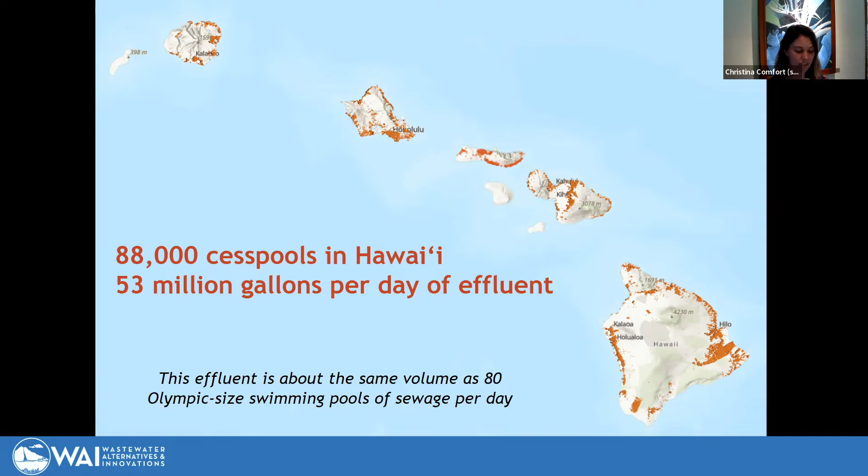And then from the groundwater, this pollution also goes out into streams and the ocean through groundwater seeps, where it impacts the environment.

Some of these environmental and public health hazards include nutrient pollution going onto the coral reef, which causes invasive algae to overgrow the corals and degrades the habitat. This also affects fish populations, and it can also include other types of pollution that can lead to coral disease.

On the public health side, as I mentioned, drinking water pollution over aquifers is a problem. And with increased amounts of nitrates in drinking water, you can start to see nitrate-associated cancers. They see this in Long Island, and that's something we want to try to get ahead of and avoid as much as possible in Hawaii, of course.

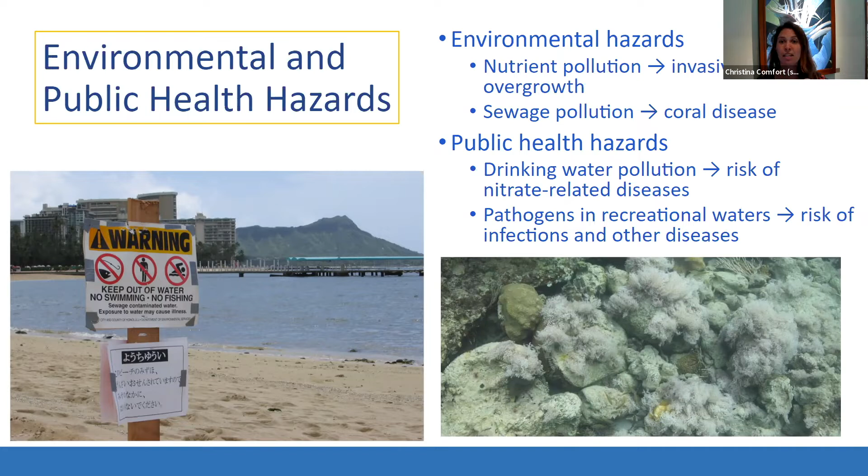Also, pathogens in recreational waters. Probably a lot of you guys who live here have had this experience of going swimming in dirty water and getting sick to your stomach, getting some kind of infection, and those can definitely be caused by sewage pollution.

I'm just going to take you through a couple areas in the Hawaiian Islands that have really clear pollution problems, just to give you a sense of the magnitude of the problems in some particular neighborhoods. The first area to look at is Kahalu'u here on Oahu.

This is an area where Surfrider's Blue Water Task Force has been monitoring for about 3 or 4 years, and we take biweekly samples. I'm a volunteer with the Blue Water Task Force. We take biweekly samples for fecal indicator bacteria. And at this site, 86% of the samples we've taken over the years have been above the closure threshold for fecal indicator bacteria. So this is a really chronically polluted neighborhood, lots of cesspools in this neighborhood.

And lots of people use this area too. There's a boat ramp there. There's a canoe club that's right there. People go fishing on the reefs. So we can see really clearly how this impacts both the ecosystem and the community.

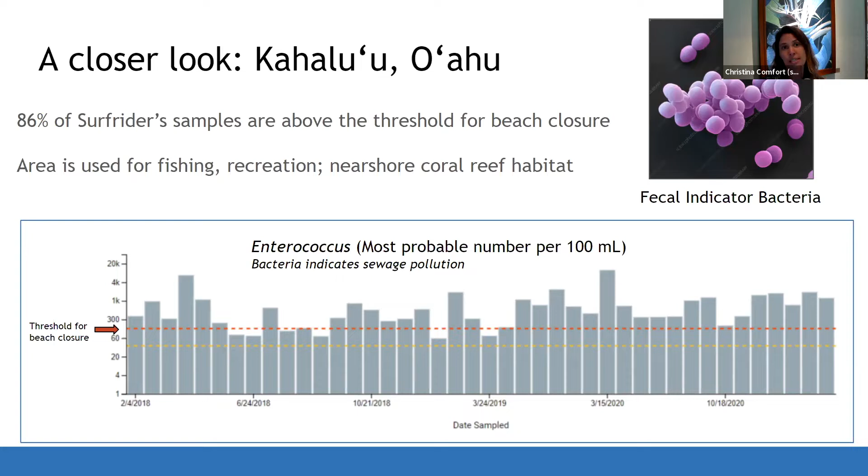Moving over to the Big Island of Hawaii, in Pu'ako. This is an area on the South Kohala coast where there are a lot of homes with cesspools and failing septic tanks, failing ATUs that are right on the coast on lava rock. And dye tracer studies from the University of Hawaii at Hilo have shown that after a toilet flush, it can take as little as 6 hours for the dye they put in the toilet to get onto the reef.

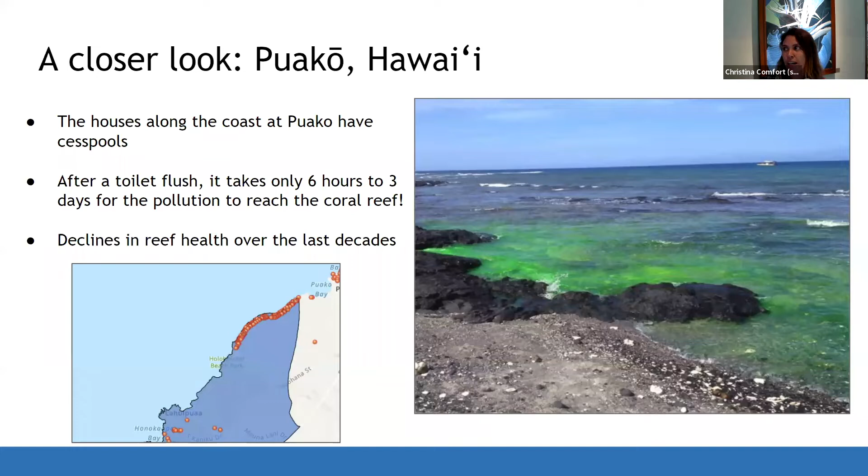So as you can imagine, there's absolutely no treatment happening. That's direct sewage going right onto the reef. And it's a really beautiful reef ecosystem, a lot of diversity there. This is just an example of how reef health can be really impacted by these pollution problems.

And with that, I'm just going to start transitioning into some of our updates and progress since our last convening. So the first thing I want to mention is that there is a new prioritization tool. For those of you who have been following the cesspool issue, you know that in 2017, there were priority areas designated by the Department of Health. There were 14 priority areas, down to 13 now, because one was paved over by lava flow.

But there were lots of areas that were not categorized yet. And through a really massive effort through some University of Hawaii researchers and the Cesspool Conversion Working Group, we have a new prioritization tool that has categorized every cesspool in Hawaii. They used a lot of different factors, including soil type, weather, ecosystem potential for recovery, beach use data, all kinds of different factors to categorize the risk of each individual cesspool.

One thing that this prioritization tool does not include is water quality data. So that's just something to keep in mind, is that it's something to use, but then also we need to look at our data on the ground.

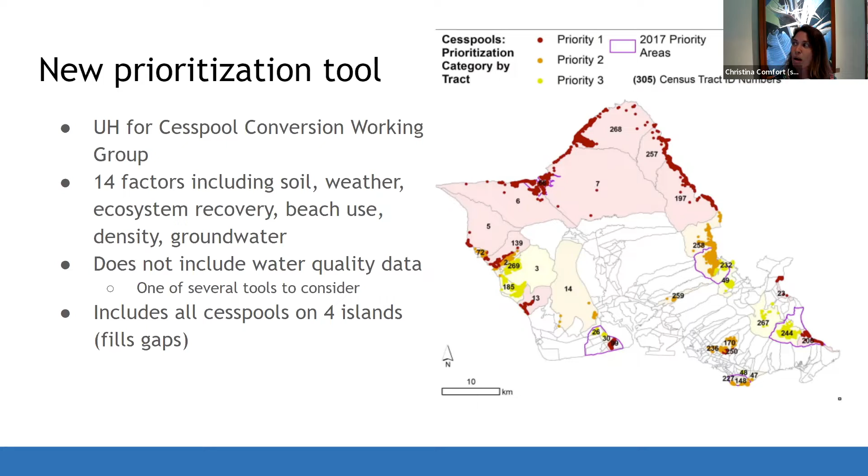So I'm just going to quickly show the maps. You can see on Oahu, the North Shore is identified as a problem area, the entire North Shore. On Maui, there's areas in upcountry and also on the west side and on the North Shore as well that are very high priority. Big Island, Kona Coast, Hilo, Puako area, you can see in the northwest area up there. And Kauai, lots of areas of high priority.

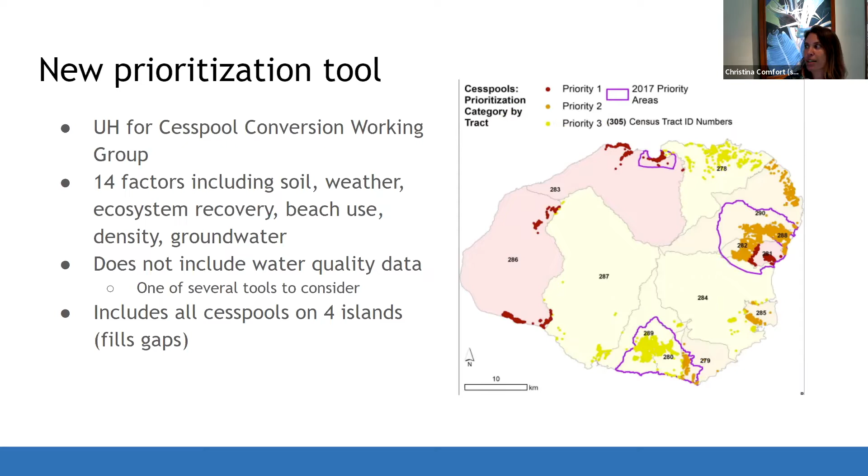So this is exciting and just a new tool to help us decide where to focus finances and effort for cesspool conversions. And I will pass it back over to Stuart to share a little bit about our technology updates.

Thank you, Christina. We're very lucky to have Christina, who's in the process of getting her PhD at UH and is one of the top water quality researchers and scientists in Hawaii. This is the reason that underlies everything we do.

It's about water quality, and since many of us are surfers, ocean lovers, divers, that's one of our motivating factors. I'm going to talk briefly about our tech partners who aren't here today, just to give a brief overview, and then we'll hear from the ones who are.

Cinderella was the first group we met when Chris Lee and I went and gave a talk at the Bill and Melinda Gates Foundation's Reinvented Toilet Expo in Beijing—one of those places where you find yourself thinking, what are we doing here, how did we get here. But they were fascinated to hear about the situation in Hawaii. We met these folks, a Norwegian company called Cinderella, and they were very persistent and wanted to get involved and help out in Hawaii.

So we introduced the first incinerating toilets to Hawaii. There are now more than 25 across the islands. We've been very successful, with some on farms or off-grid, powered by propane, and some electric-powered for in-homes. A number of government agencies have bought these. Instead of putting in all the plumbing and a leach field for a new toilet, you can just put in one of these incineration toilets. They're waterless, and it's just an amazing company—we've had nothing but great feedback from them.

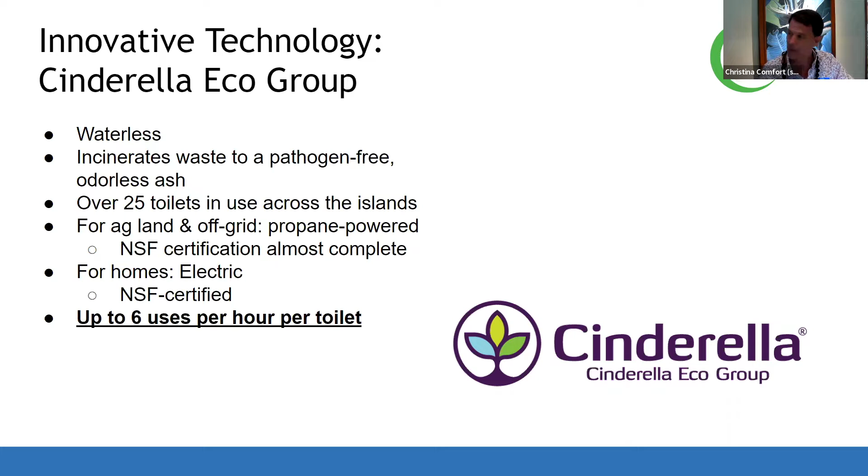We were also very lucky to establish the first one—I have to thank Mitch Dollier for this. At our first Innovations in Sanitation Convening, he said, 'I've got the perfect place for this technology.' I was almost like, I know what you're thinking. He said, Coconut Island, Hawaii Institute of Marine Biology. And it was the perfect fit—they embraced it, they love it, and they went and got another incineration toilet there.

And then this has been really exciting—we applied for a Kauai Innovation Grant to transform a home that was on a cesspool in Kapa'a, replace all the toilets with incineration toilets, and then do a gray water recycling system. This is the first of its kind in the world. The people in Norway at Cinderella were absolutely thrilled to hear about this. I really want to give a round of applause for Yoko, who designed this—not only award-winning, but a really brilliant idea.

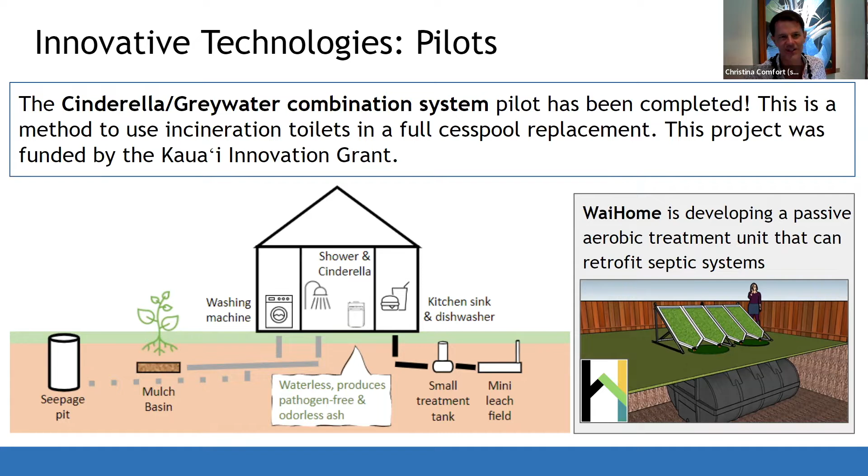So we have a gray water recycling system that does that. And then one of our other partners, James—where's James? You can raise your hand—from WaiHome. He's designing a system that's a passive aerobic treatment using panels, and it uses algae to treat the nutrients and circulates on its own. That's in development right now, which is really exciting.

And then we have Emily from Elemental Accelerator here, and they've been a great partner. They had a deal day kind of competition, and we were selected along with Cambrian to try their containerized MBR technology here. It's decentralized, neighborhood scale—that's where we think we really need to go in Hawaii. Municipal systems, these plants, are just too big, too expensive, and you have to build sewer lines to transport all the waste. So we've been working with them. We have the first system that went in at Pacific Biodiesel on the Big Island, and we're looking at some other areas across the island this year, as they're part of the Elemental Accelerator cohort.

And then this year, as the applications are winding down, we're partnering with a group called Wasted, that believes you should never waste these products—because throughout history they've always been reused. It's only in the last 150 years that we've gotten away from that; these have lots of nutrients. So they're looking to replace the porta potty, which I think we can all agree would be good if we found something with a more pleasant, upgraded experience. They've given us some credit for creating a kind of square partnership, where you have Elemental Accelerator with the funding, bringing in these innovative technologies, then the technology company applying, and then the customer on the other end—but they found there was a missing piece, and that's the local partner that can help these pilot projects move forward.

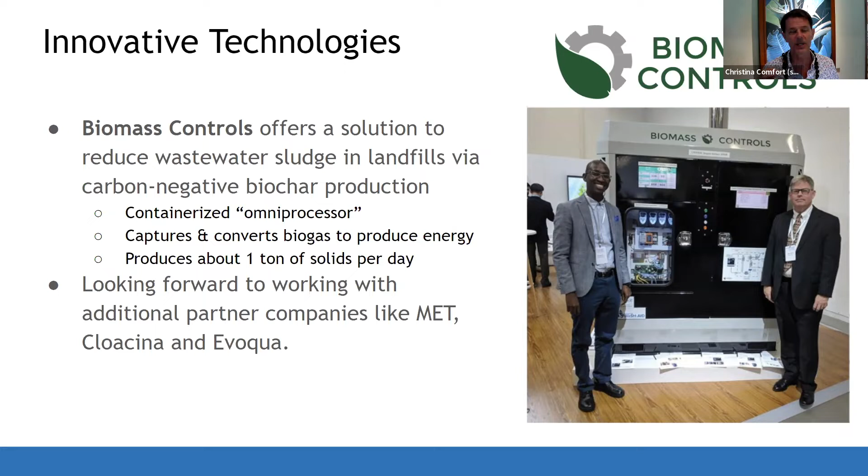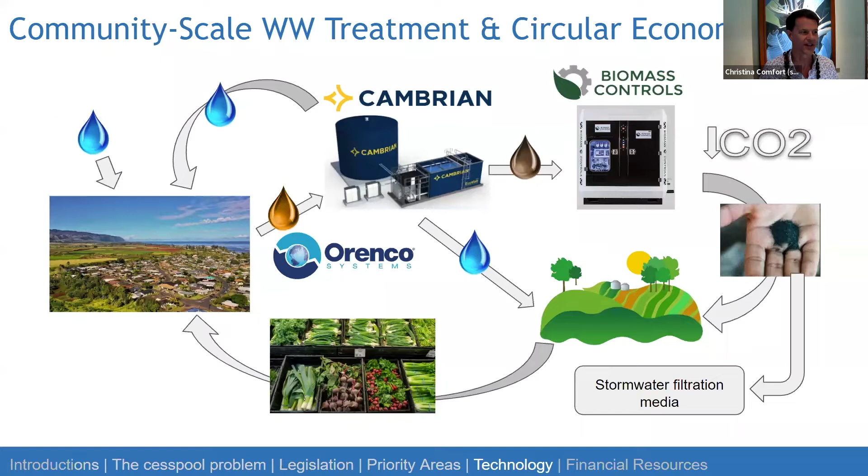When you add up Cambrian's ability to do the MBR treatment - and there are other folks here today that do similar, Cloacina does the same - then you can dewater it, and the water can be so clean that it can be used for irrigation or landscaping. And then we could take the sludge and incinerate it using pyrolysis, produce this biochar, and that can be put on the land. It's not only great as a soil amendment and increases fertility, but it's also a carbon sink, and it reduces runoff and sedimentation. So we're looking at combining all of these technologies in a place like Ma'alaea, which Kelly King will talk about later. This would be one of the first of its kind in the entire world. So Hawaii could literally go from being the last to convert cesspools to being an international leader in this field. And that's what really gets me excited about what we're doing here.

We have done a number of town hall meetings across the state, working with legislators like Chris Lee, who's been there from the beginning, and Representative Nicole Lowen. We do town halls in these communities where Christina pointed out the maps, where those priority areas are. So we just need to educate them - how many people knew about the cesspool issue 2 years ago or 3 years ago?

Yeah, this is a room that's pretty educated - you're invested, but most of the public had no idea. We've talked to people who literally said, 'I still am not sure what a cesspool is and why they're bad.' So we've done all these town halls and we're getting really good reactions. We were afraid at first that they might be throwing eggs at us, because they're like, 'you're the guys who are making us convert our cesspools.' But when we explain the health risk and the environmental risk and the opportunities, then people get excited. That's been really great to see.

We also have a bioreactor garden training that we're doing with Ridge to Reefs. We've done 2 so far, Val? 2 so far. And then we have 2 more coming up - we're going to be doing one on Kauai and one on Maui at Pukalani this Friday. And then we have a Clean Water Hui that Christina heads up. These are really talented volunteers who are helping us with water quality issues and all the other issues that we're working with. We'd love for any of you to join and help us with that.

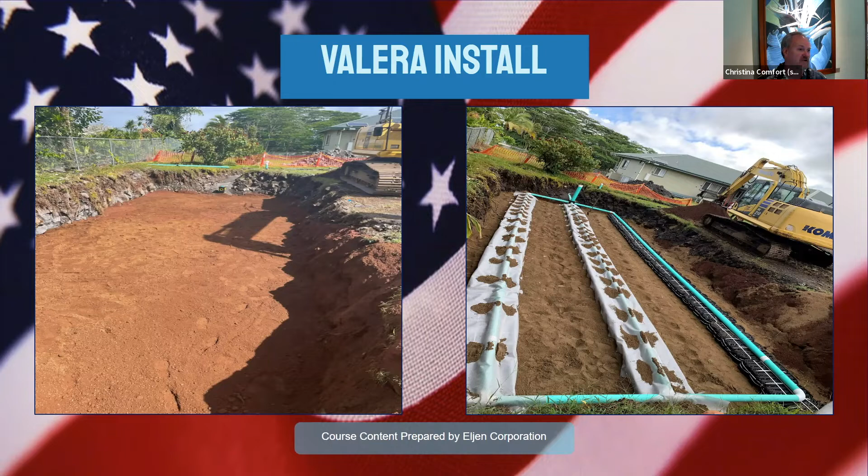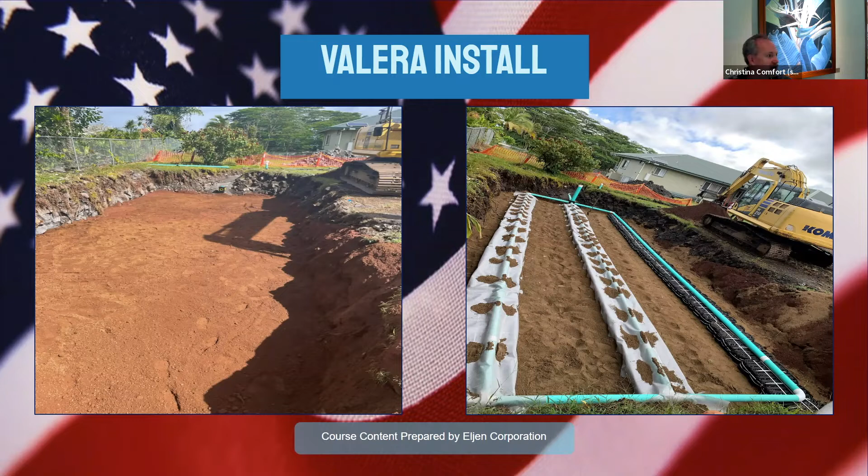Here's a picture of the system going in. We installed about 2 feet of cinder soil, and you can see we had to drill through a bunch of rock - he had about 8 inches of topsoil. The guy that installed it was a one-man operation. He would get on the backhoe, chisel out all the rock, load it into the truck, take the truck down to the quarry, drop it off, come back. He did everything himself in a couple of weeks.

It's hard to tell from that picture, but it's down about 5 feet. That's after the picture on the left showing the 2 feet of cinder soil in there. On the right are various stages of completion - on the far right are the modules without the gray fabric over the top. Once you have the gray fabric over the top, you can fill sand in between, up even with the top of it, and then cover it up. But that was a good project, went pretty well.

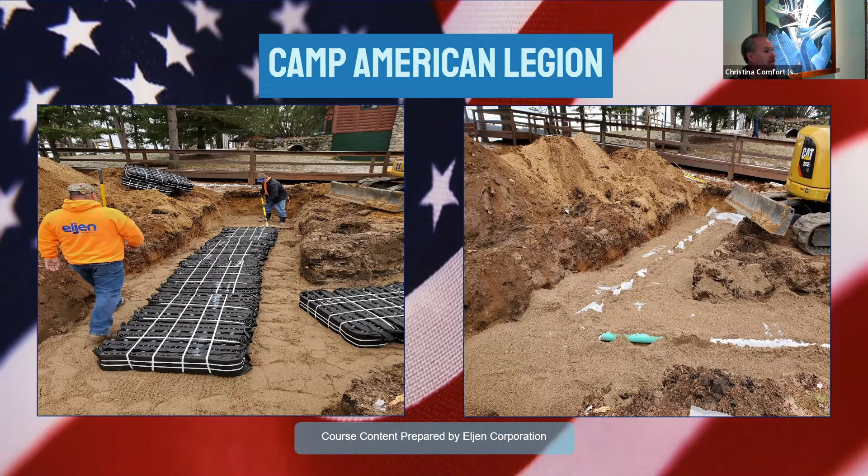This one is in Wisconsin. We like to help out veterans or veteran organizations. Camp American Legion has 16 cabins on a lake, and we donated a system for one of the cabins that had to be replaced, their septic system. They allow veterans to go there with their families and stay for free. They don't charge them for anything. They take them out fishing, they can do canoeing, whatever they want. It's out in the middle of the woods, a beautiful place to go. So we thought that was a worthy donation for us.

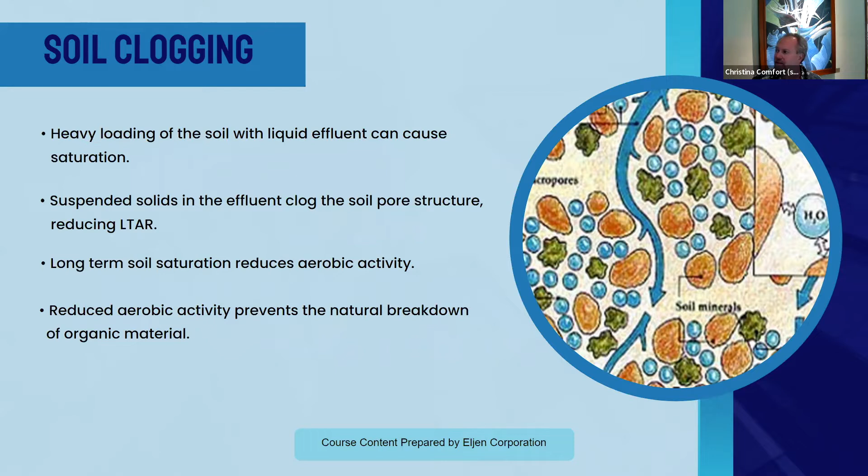So what you have here is how soil clogging starts. Heavy loading of the soil with the effluent can cause saturation. Once you get saturation, the soil expands, and then the pores clog up. The solids in the effluent are also going to clog the pores, reducing your long-term acceptance rate. And then once you have soil saturation, you have reduced aerobic activity. The anaerobic bacteria does not break down those solids as fast as the aerobic bacteria does. So the reduced aerobic activity prevents a natural breakdown of the organic material. You can see how the effluent flows through. The little green things are the solids, and then the water gets clogged there. Those pores expand, and then it just kind of shuts it down and doesn't let the effluent flow through naturally.

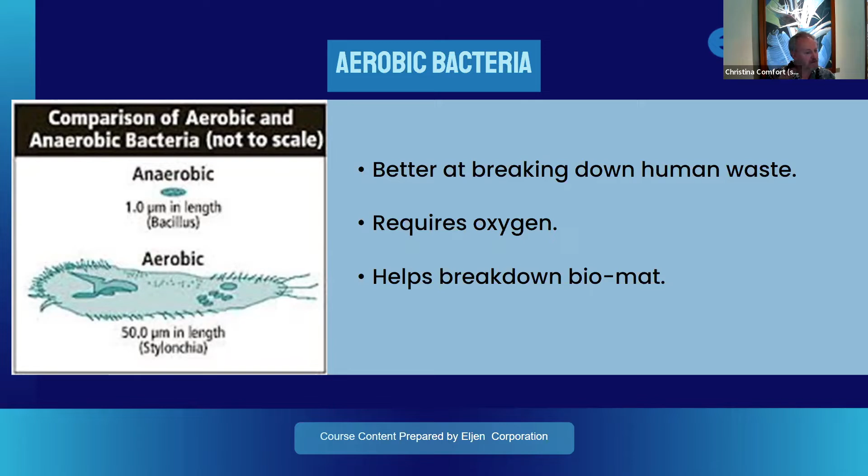On the top is a picture of the anaerobic bacteria. The bottom one is the aerobic bacteria. If you were to look at those under a microscope, the anaerobic bacteria is just going to be sitting there stationary. It's going to twitch once in a while, it's not really going to move, but the aerobic bacteria darts around everywhere. It's always looking for food, it wants to eat all the time. It requires oxygen, so you have to have it. It helps us in our product keep the biomat to a manageable level, because we're using that biomat to collect those organic solids. But if it grows too thick, it's going to take too long for the effluent to flow through. So our system becomes aerobic. We need that aerobic bacteria to manage our biomat buildup inside the GSF.

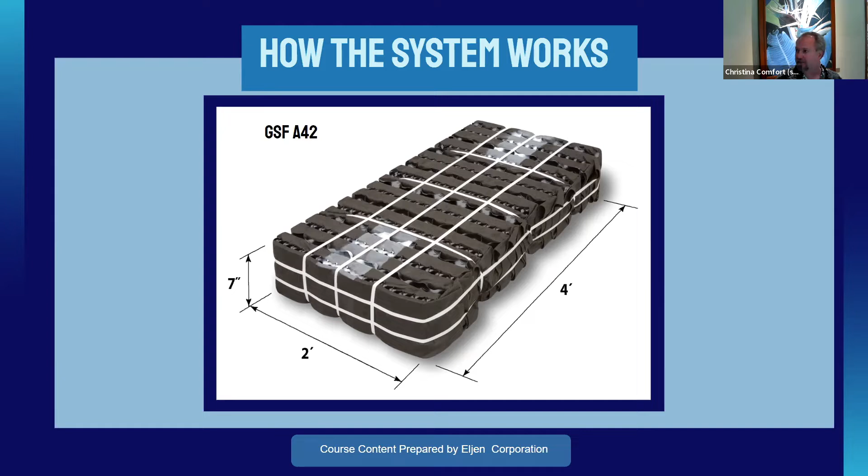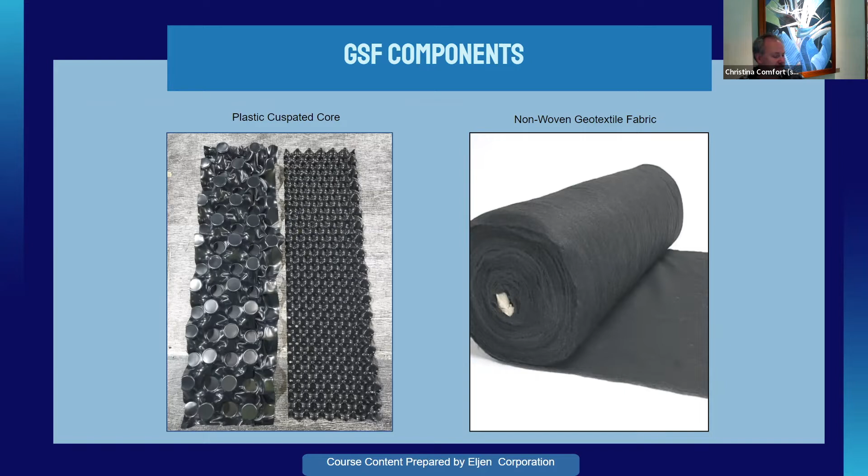So the open air channel areas are where we have the plastic core. What we do is we wrap that fabric up and down and over and under the plastic core material. The plastic cuspated core material, there's one large and one small on the left. And then the non-woven geotextile fabric is on the right. You can see in a picture on the left how it's wrapped up and down, and then they strap it together for the finished product on the right. So that's one continuous piece of fabric. All that vertical surface area is going to grow biomat. When the effluent flows over that biomat, that's going to collect those organic solids. It's also going to process pathogens.

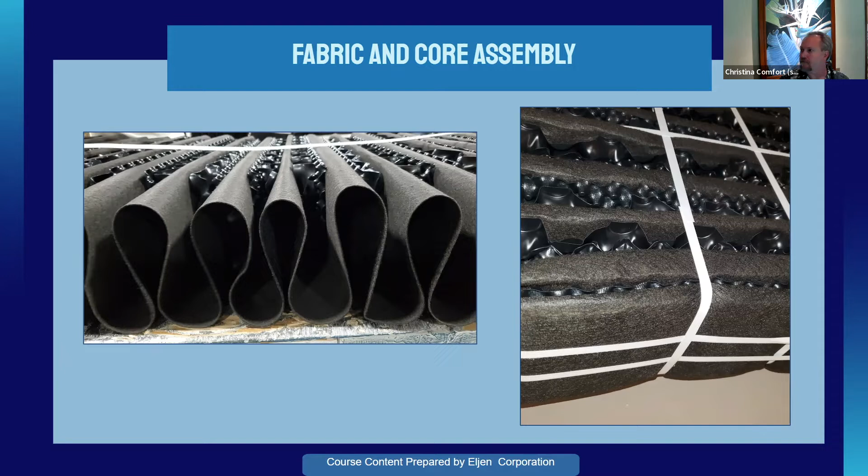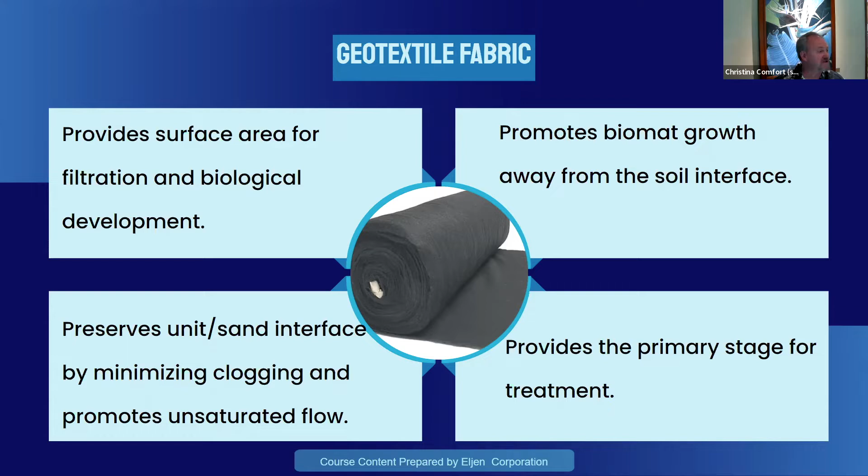So the fabric provides the surface area for the filtration, as I just mentioned, in the biological development. It promotes growth, biomat growth away from the soil interface, preserves the sand and unit interface by minimizing clogging, and it's a primary stage for treatment.

The core provides the structural support. The product is H10 load rated, so you can drive over it with a 16,000 pound vehicle. We never recommend you drive over your septic system, but in some states it's required.

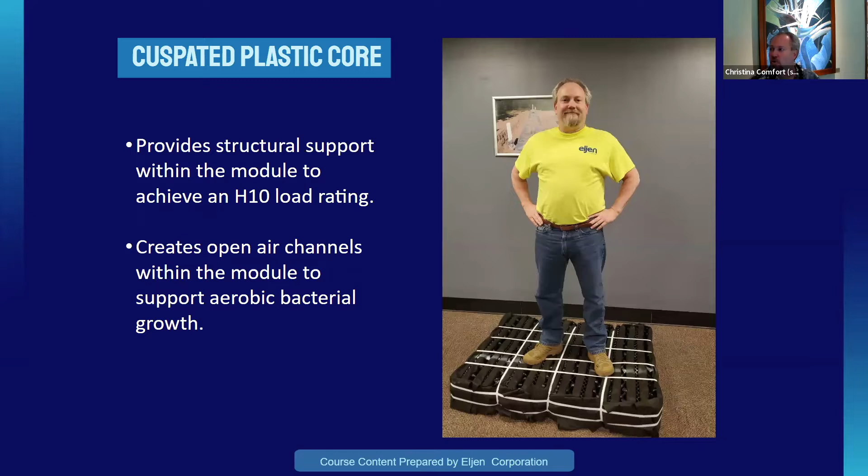It also creates open air channels within the module to support the aerobic activity.

When it's underwater, it's anaerobic. But at low tide, the aerobic bacteria comes in and starts to eat away at all that food, all the nutrients that were left there.

That's exactly how the GSF works. High tide event, your system gets dosed, you deposit solids, you grow biomat. As the effluent drains out, the aerobic bacteria come in and they start to break down all those organic solids, keeping that biomat at a nice manageable level.

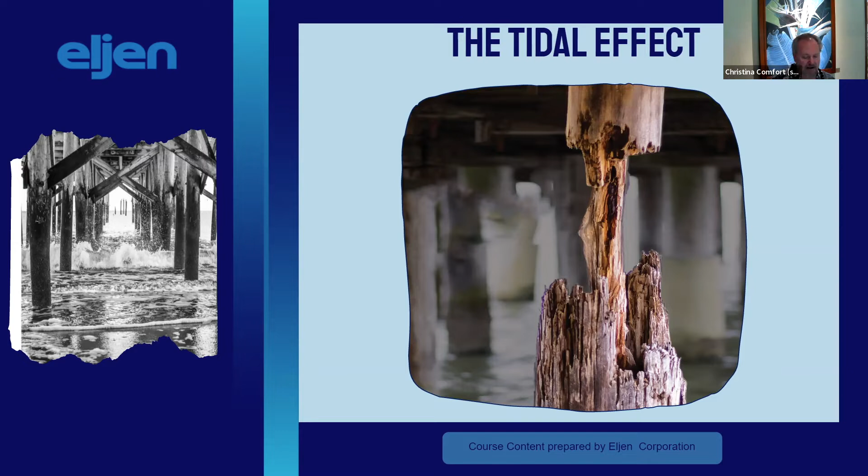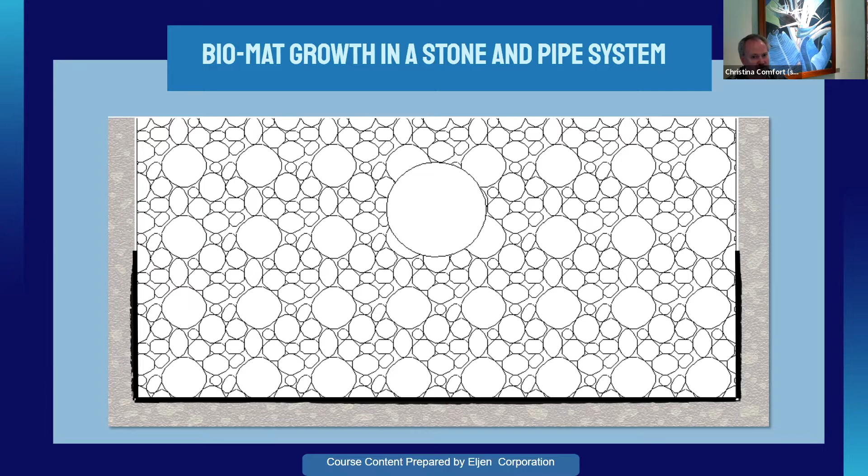It may take a couple of years before that whole trench accepts the effluent at an equal rate when it reaches equilibrium. But the longer it takes for that effluent to drain through, the longer it stays wet, then it grows thicker biomat. I don't know if anybody's heard the term 'creeping failure,' but that's how they discuss how a stone and pipe system works. It's a creeping failure, just a matter of time before the whole thing fails.

Having that sand in there, if you have a fast soil, the sand allows the effluent to drain out at a rate that it still gets treatment. Stuart or somebody was talking about faster soils earlier - this allows the effluent to drain out at a steady rate. If you have a clay soil, it's allowing it to drain out at that steady rate where it doesn't cause saturation. So it works on both types of soils very good.

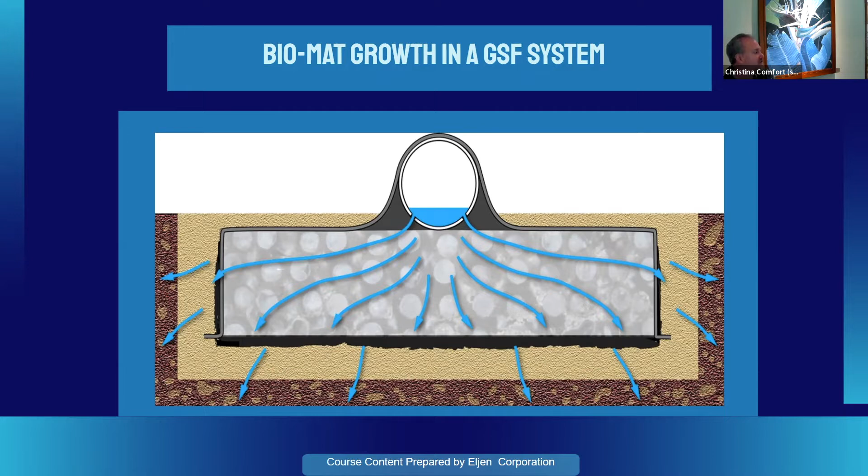Once the effluent drains out, now you have an aerobic treatment zone inside the module because it's draining out through the sand, and you're going to have a thin layer of biomat build up on the sand, right where the fabric and the sand are contacting each other, because you have your two wet surfaces. So it's going to take longer to dry out than for the rest of the system.

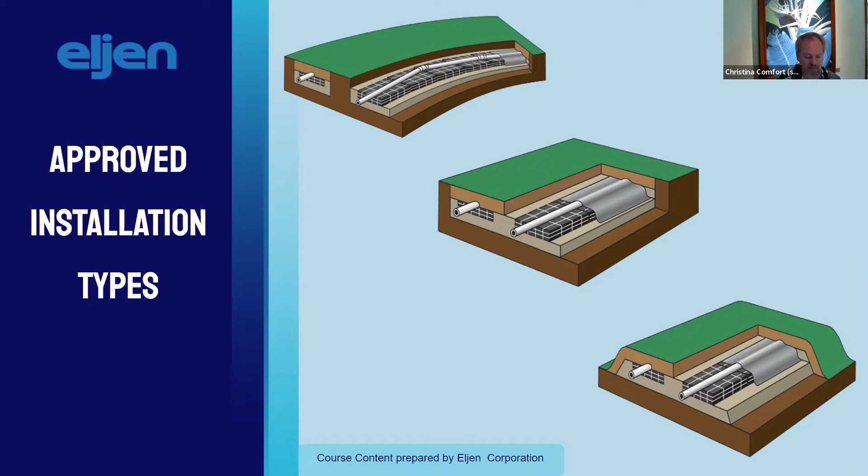Some of the approved installation types: we have trenches on the top, beds in the middle, and mounds on the bottom right.

You can see that white stripe on there, that indicates which side is up, and I'll have a slide on that.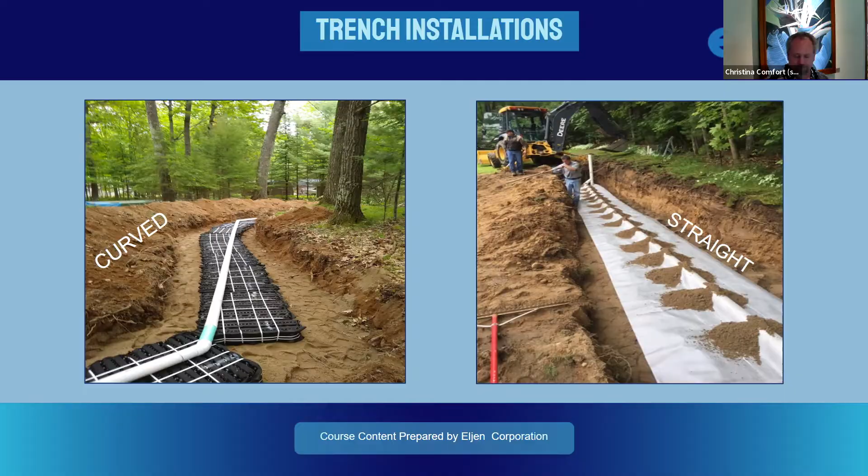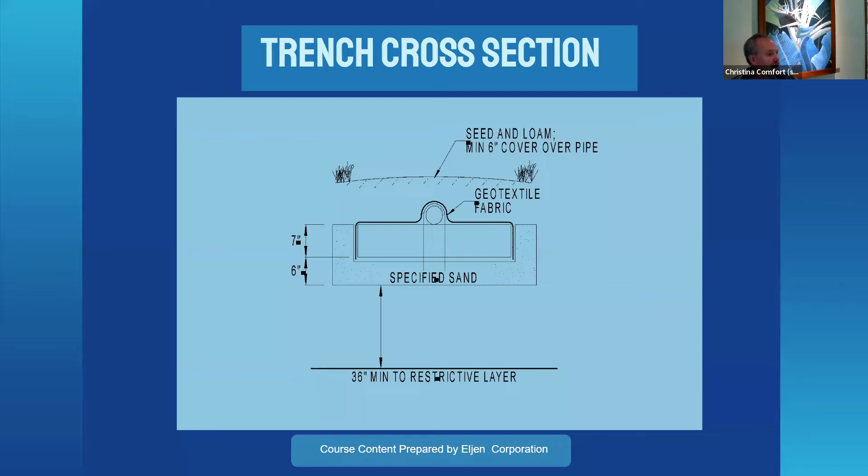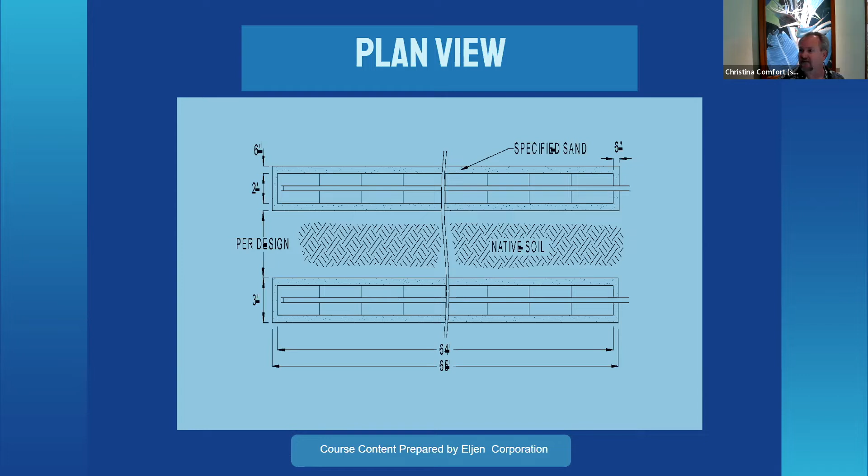Oh, 5 minutes—I thought they said 5 feet. 5 minutes for Q&A, right now? Yeah, so you can just go ahead.

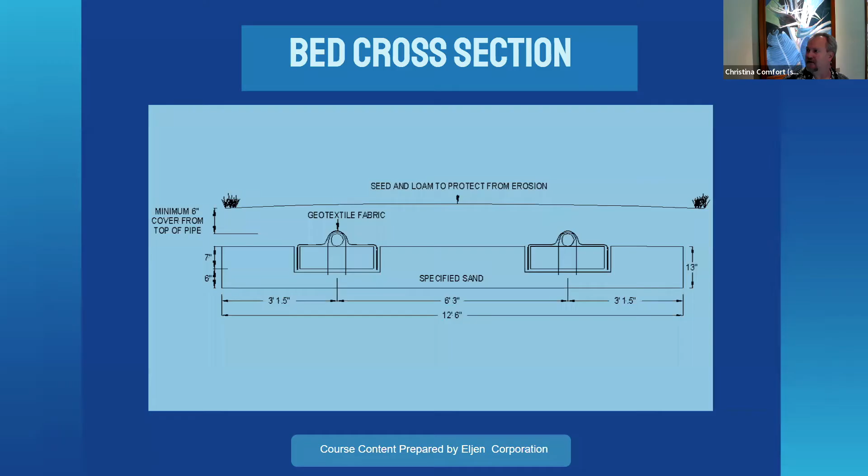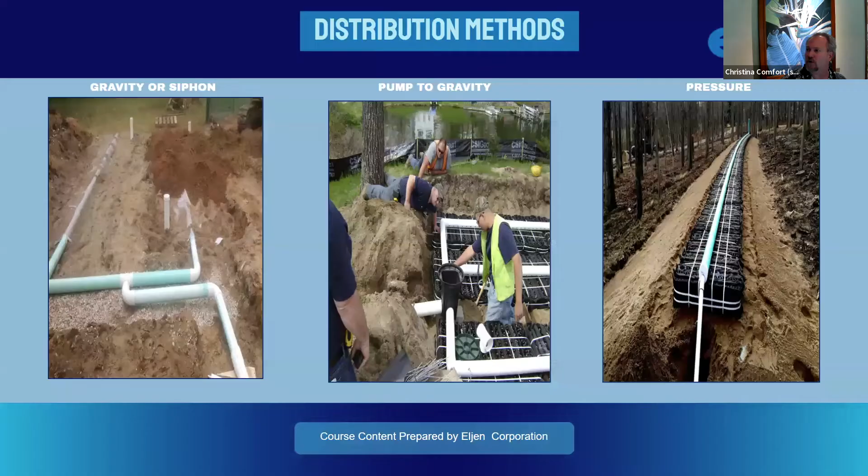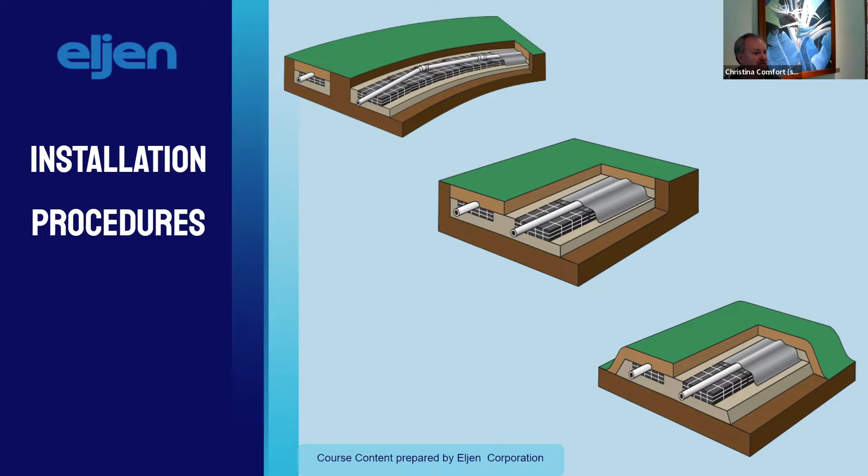Anybody have any questions? Yeah, let's open it up for questions.

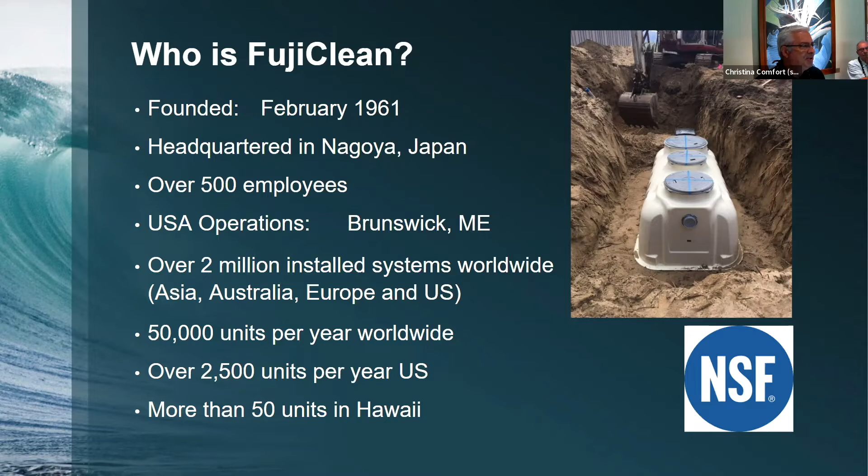Worldwide, Fuji has over 2 million systems installed. One of their big operations is in Australia. America, the US, is a very new and strong market, and much so here in Hawaii as well. We've got right now more than 50 in the ground and another 25 on its way being shipped here now. So during COVID things were very strong because people had discretionary monies and things were being built. But I think we're going to see a slowdown here in the next year or so for sure.

They were highlighted in Newsweek International magazine last year, or I guess 2 years ago. So they're very prominent, they have a great research facility. We were scheduled or hoping to go check out the technology ourselves. We haven't seen the manufacturing facility yet because of COVID. So things are starting to lessen and lighten up, and we're hoping to get over there and really get Fuji more integrated in the Hawaii market here, which we just haven't had the opportunity to do yet.

At Fuji, there's 3 of us. The main license is held by an individual who's not here, he's out of the Boston area. His partner, Richard, who's going to go over some of the advantages of the system in a little bit, and myself as the local dealer. So I have an engineering company and then the FujiClean dealership for here in Hawaii.

We have a number of models, we can cover the gamut for just about any situation for any project out there. So we have systems that are both NSF 40, which deal with your basic aerobic BOD and total suspended solids, and also the NSF 245, which are for certain applications with a very low nitrogen effluent quality. They come in 2 series: the NSF 40 is known as our CE series, our basic models, and our CEN, the N for nitrogen, are our NSF 245s.

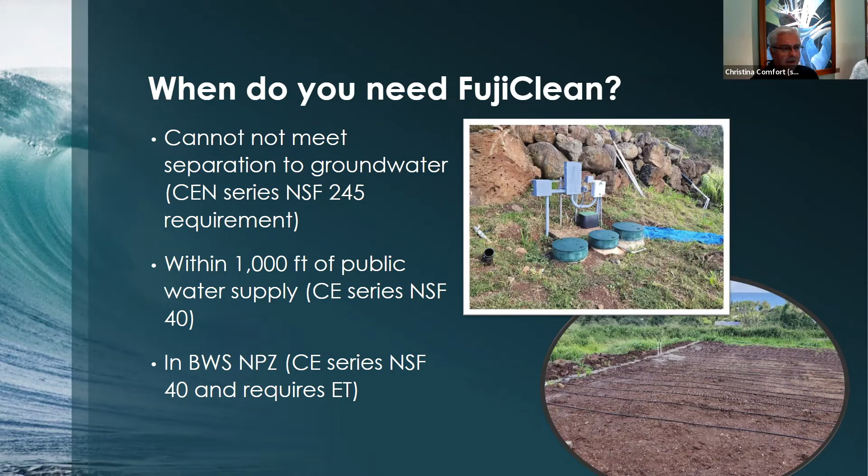So that's the last one, the no-pass zones. We do a lot of ET systems because we have very clean effluent that we can pump through the drip irrigation systems. The last one is if you're within 1,000 feet of a public water supply, and this applies to all islands. We've done some on the Big Island, some on Maui, where if you're within 1,000 feet you have to have an aerobic system, and it has to be a minimum NSF 40. That's where most of our sales are - we're doing a ton on Kauai, Hanalei area, Kapa'a and such. There's just a lot going on Kauai as well.

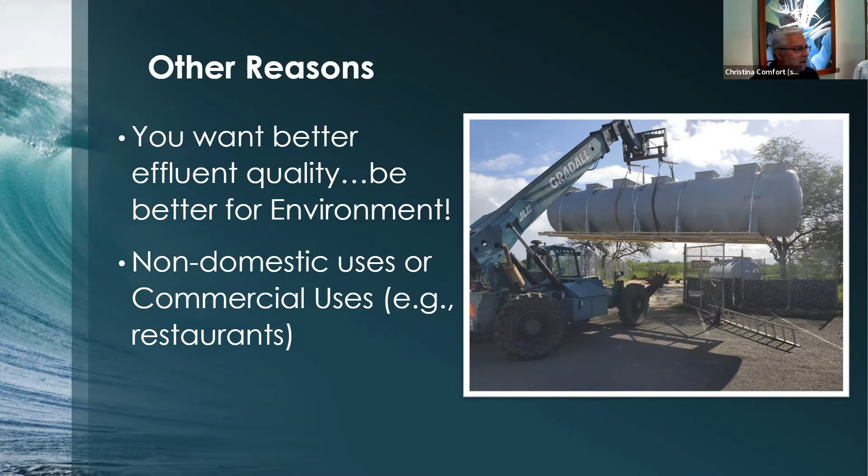It's been great. Other reasons - we get some who just want to be better for the environment. Some of your more luxury estates where cost isn't an issue will do that. This is the picture of the 6,000 gallon system going in at Olomana Golf Course. We also have other applications for non-domestic uses, for restaurants and other industries, where standard septic just isn't going to work, so aerobic is needed.

The difference is - and I've got to say, I'm happy that I ate lunch before Scott went through all that bad bacteria, good bacteria, and all that stuff in the leach field and everything.

Hey Scott, do you happen to know who the bathroom superhero is? The Flush Gordon? Yeah. You know what Superman calls his bathroom? The Super Bowl. All right, I don't have any more today.

So the difference between septic and aerobic is: with septic, the ground, the soil is doing the heavy lifting. As in Scott's example, we did not have soil. Actually, I was the engineer who helped design Elgin, and I volunteered my engineering services for that program.

So we have a lot of prohibitive layers here: rock, basalt, very expansive soil. So it's very hard to discharge. When you have septic, that biomat builds up, and that's where you see the failures, in the leach fields. In this case, aerobic systems, whether passive or active, are doing the heavy lifting. By the time your effluent is hitting the ground, you have very clean, clear, oxidized water, and the soil doesn't get clogged as much.

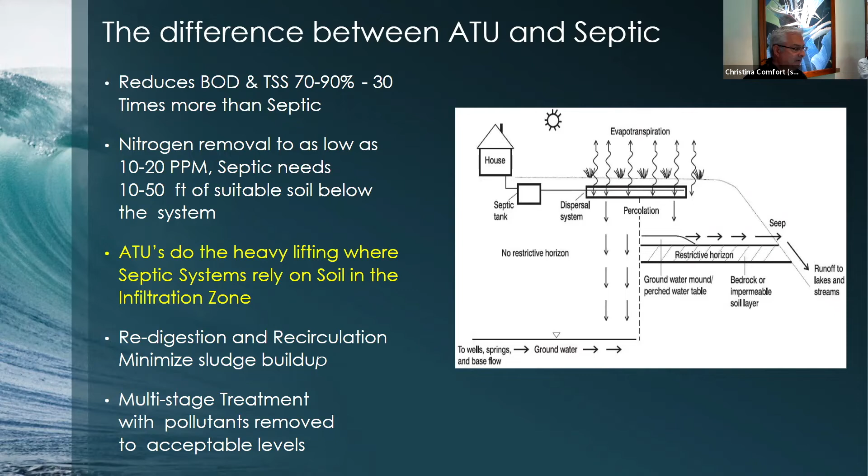So you have much better longevity to your leach field in operation. And also we're constantly redigesting, so we don't have a lot of solids build up. I know I'm going to run short on time, but I have to hand it over to him. He's going to go over a little bit more on the advantages in the actual treatment. Thank you.

That's it, Bill? I got 2 minutes, right? Well, you better hurry then. Okay, you can skip that.

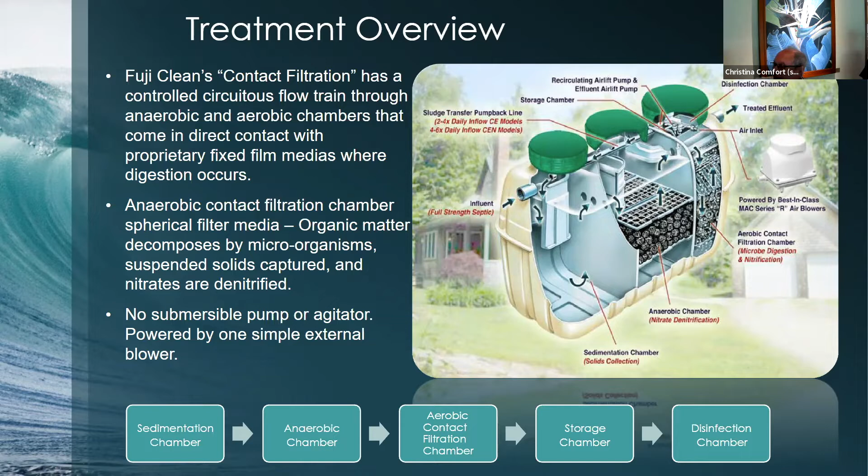Yeah, okay, well, that's our tank. It's cut in half. It's got 3 chambers. First is equalization and sedimentation. The middle one is anaerobic, and the last one is aerobic with clarification. As Dennis said, we do have a denitrification process, and that's it.

Advantages. One of the most important things we want to stress is the fact that these things come completely assembled from the factory in Japan. You put them in the ground. The contractor has absolutely nothing to assemble. He just puts it in, connects the inlet and the outlet. And I think that's extremely important.

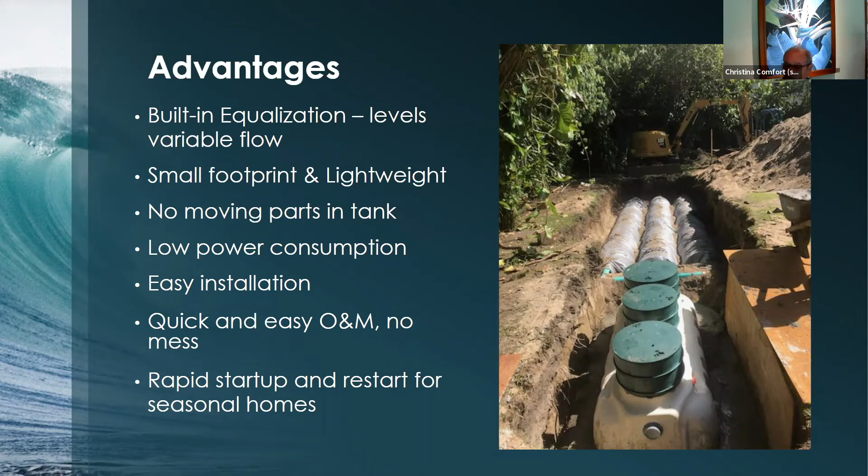The other advantages are that we really don't have any mechanical parts inside the tank. There are no electrical, mechanical pumps. There is no metal in the tank which may disintegrate.

Now, this is the important thing I want to get to, if I only got 2 minutes: when people are considering what type of system to put in, they focus on how much the unit is going to cost, what it's going to cost to install. Very rarely do they consider what the cost is to operate this thing. And in many cases, the cost difference, which may be many thousands of dollars of the capital cost, could very easily be gone in a few years when you consider the operating costs.

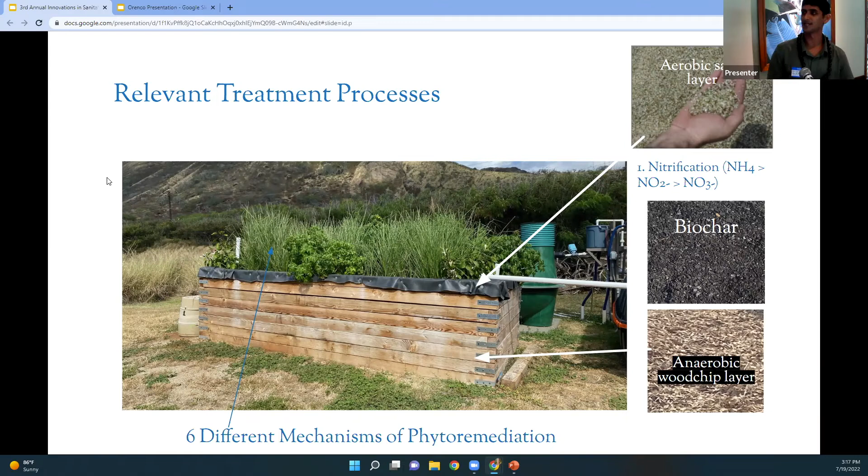I think the common thread here is that all of these are local materials. The sand we get from local aggregate suppliers. The biochar and the wood chips are actually made from invasive species—in this case, I believe they were made from Java plum.

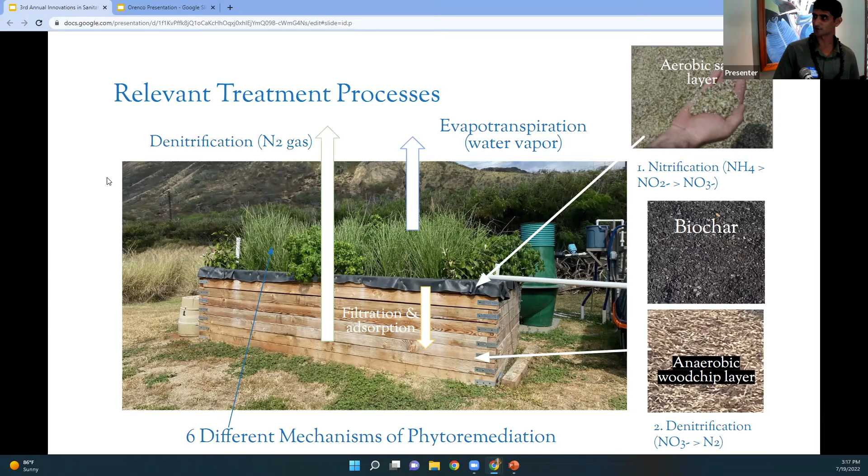So you can see what the different layers do. We have nitrification, denitrification, and last but not least, evapotranspiration, which allows us to reduce the volume of wastewater.

Why vetiver? It is a fast-growing, non-spreading, and non-invasive grass. It's really a highly functional plant for us because it's got an incredibly high capacity for absorbing pollutants such as nitrogen and phosphorus. Furthermore, it's highly salt tolerant.

We'll get into that here in a second. We have some projects right on the coastline, so even in situations where you get salt spray, that's something the vetiver can handle very easily. Lastly, according to the Pacific Islands Ecosystem at Risk, the sunshine cultivar of vetiver we use has a -8 rating. Again, it's triploid—it cannot propagate itself.

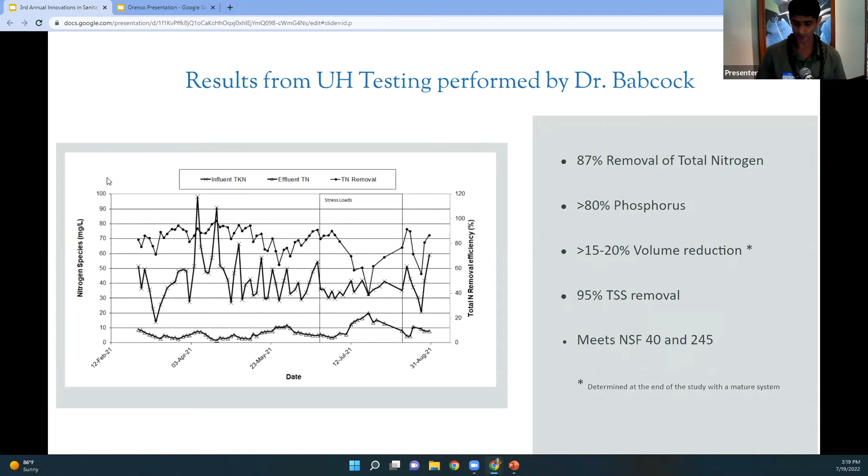I think one of the keys with our system is that our goal is to ultimately enable local circular economies. We really look at this as a new paradigm in wastewater treatment. Our nitrifying media is, as mentioned, a local basalt aggregate that has enormous benefits in that, in addition to reducing some of the phosphorus, it allows us to work with local quarries and aggregate suppliers. Similarly, the other parts of the media, namely the wood chips and biochar, are from invasive species, so we can work with landscapers and other local businesses to really create circular economies.

It's also worth mentioning we've secured some funding from Maui County to do a pilot project testing crushed glass that would be used in the aerobic zone instead of, say, the basalt aggregate we used in our last system. Ultimately, we really think that this sort of low-cost, nature-based system can democratize access to sanitation services. Again, the costs associated with these conversions are not insignificant, so we really feel that by using local materials and local expertise, we can bring the cost as low as possible.

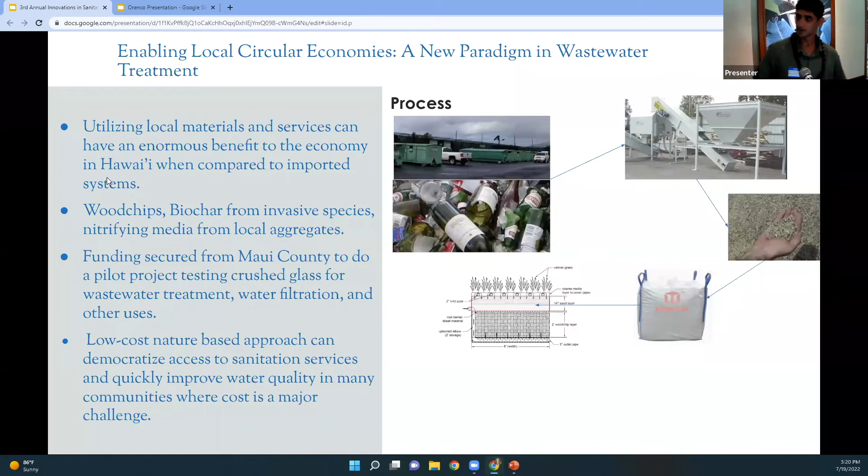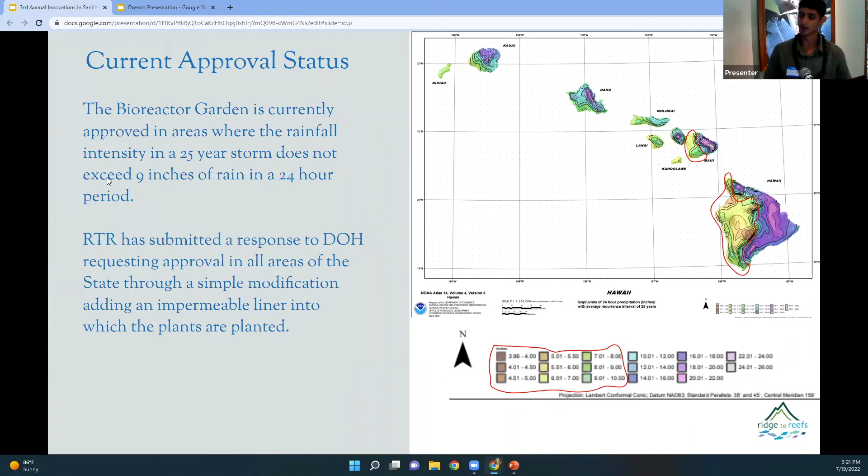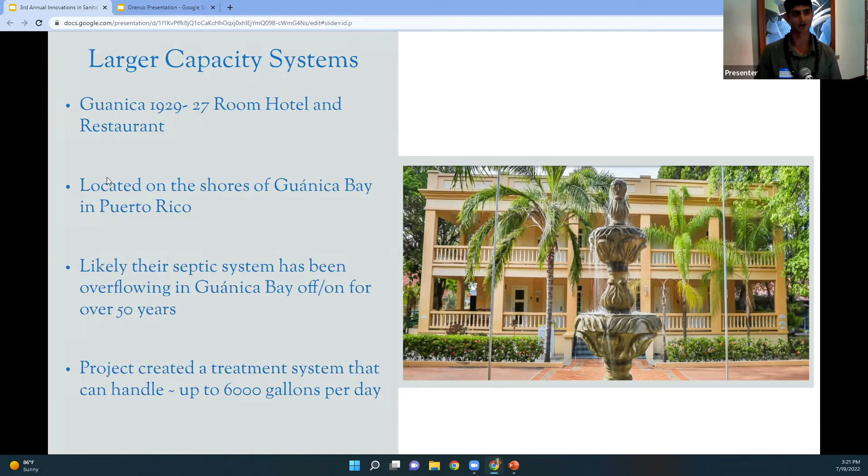And then larger capacity systems—this is a system we built in Guanica, Puerto Rico, for a 27-room hotel and restaurant. Unfortunately, their system was overflowing into Guanica Bay for about 50 years. This system we designed to handle up to 6,000 gallons a day, so about 10 times the size of the bioreactor garden we tested. As you can see, it's not too bad to look at.

This picture is just in there to highlight how close we are to Guanica Bay. As you can see, in certain conditions, it's not unfeasible to see saltwater spray, and also just a very high water table. Even in challenging conditions like these, our systems perform very well.

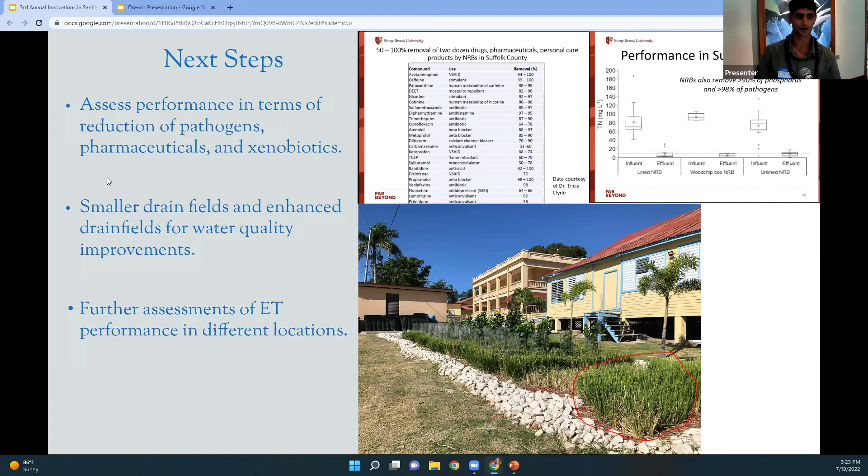The images on the top are from NRBs, similar technology but done on the East Coast. As you can see, there's 50 to 100% removal of a lot of different pharmaceuticals, personal care products, and their metabolites, and over 98% reduction in pathogens. So the data indicates that these sorts of technologies, primarily using denitrification and denitrifying bioreactors, can be very effective at reducing pathogens. That's something we'd like to test further, just to get some solid metrics on by how much.

And that's all I have for now.

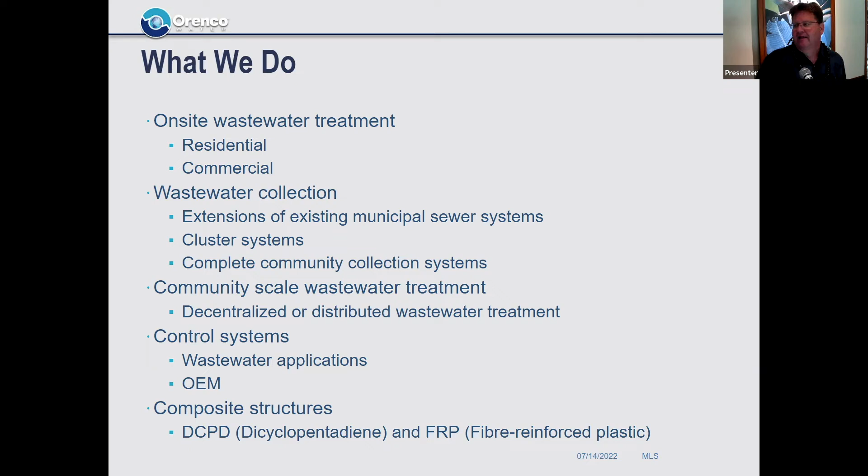So what we do: on-site wastewater treatment, both residential and commercial. We do wastewater collection, extensions to existing municipal sewer systems. We do cluster systems, meaning we collect areas that need wastewater treatment and treat it close to the source. We do complete community collection systems - we provide solutions to communities that have no sewer and go in and sewer the whole community. We do decentralized or distributed wastewater treatment. We do control systems, not only for us but for other companies, and we do composite structures, most out of a product called DCPD, and FRP, fiber reinforced plastic.

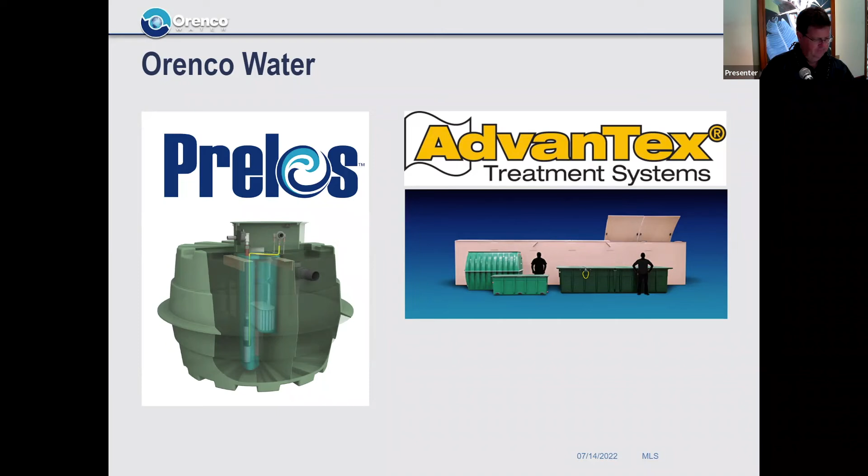Little known fact, we do a whole lot of stuff too, other than wastewater. We do composites, we do buildings, we do docks, we do bridges. So even because we're good at some stuff like composites, we actually build other stuff. We do controls, not only for ourselves, but for other companies.

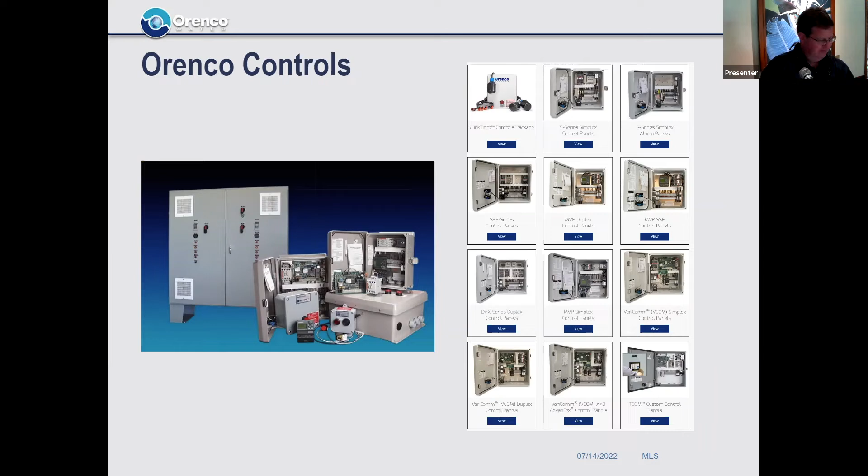And now I'll get into some of the flagship products that we do. So our recirculating packed bed filters, this is really one of our oldest platforms. You've heard a lot about treatment today, so I'll just briefly explain what this is. So what happens with these systems is wastewater comes basically into one side of a vessel.

So as we put wastewater through it, kind of the best way I can describe it is like a wick. Wastewater goes down through it. We flow air through it to keep the bugs happy, and they break down the wastewater. So again, going back to our theme about scalable, really passive systems - we were talking about energy earlier - well, the only thing we have here is a recirculating pump. You'll notice there's no big blowers. It's a very, very natural system, and it's scalable all the way from a single family home, again, all the way up through large systems.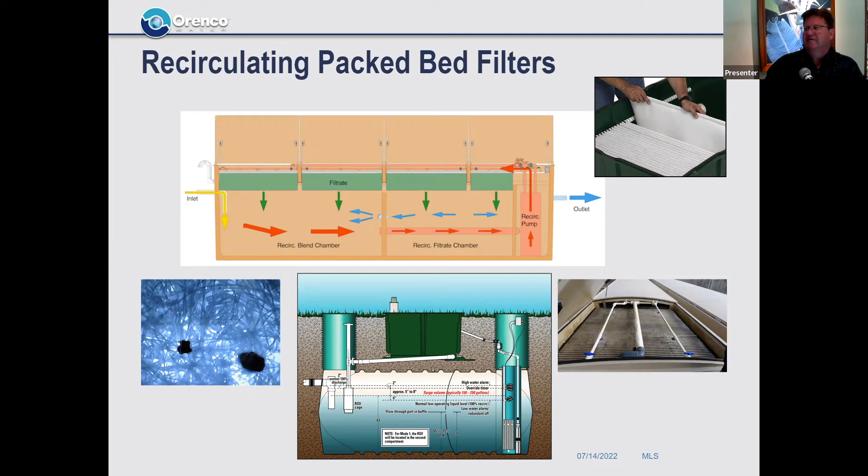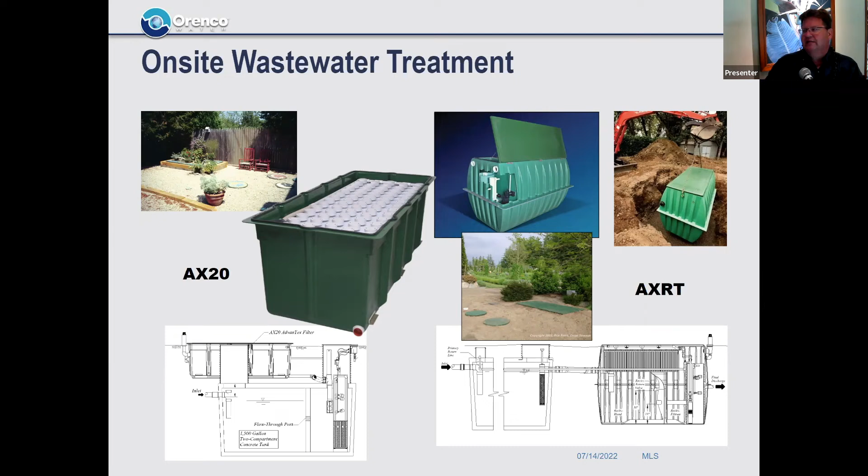So in on-site, we have an AX20 on the left-hand side, and AXRT on the right-hand side, and this is what we use in single-family homes. I'm not going to spend a lot of time here, but keep in mind that as I talk about the collection system, we always provide this primary treatment in our collection system, whether it be in a single-family home, all the way up through community systems. So that processor in the lower part always stays consistent, and we'll get into more detail on it. But again, you can see that textile recirculating filter is basically the same, we just package it a whole lot of different ways.

So here's the Prelos wastewater collection system. It gets a little confusing, and we probably caused part of the confusion. These systems, Orenco started commercializing in 1981. They date back in the US to the early 70s. They were started in Florida, and they were referred to as step systems, or septic tank effluent pump systems. And honestly, at Orenco, we have tried really, really hard to steer away from that verbiage, because people hear septic tank and they kind of get the wrong idea of what these are.

So I want to say, septic tanks get really a bad rap that they don't deserve. I mean, leaking septic tanks are bad, but watertight septic tanks are good. They provide free passive treatment. And that's really what we do at Orenco. We capitalize on the fact that if we retain flow that comes from the source and we keep it there long enough, we're going to reduce the wastewater strength before it leaves the source. And because we do that, it's easier to pump, it's easier to convey, it's easier to treat. So everything we do is based on that very, very simple principle.

But when I was saying we cause confusion - today we call it liquid only sewer. You'll hear it sometimes referred to as effluent sewer. And again, septic tank effluent systems or step systems, they're all the same thing. They're built on the same concept.

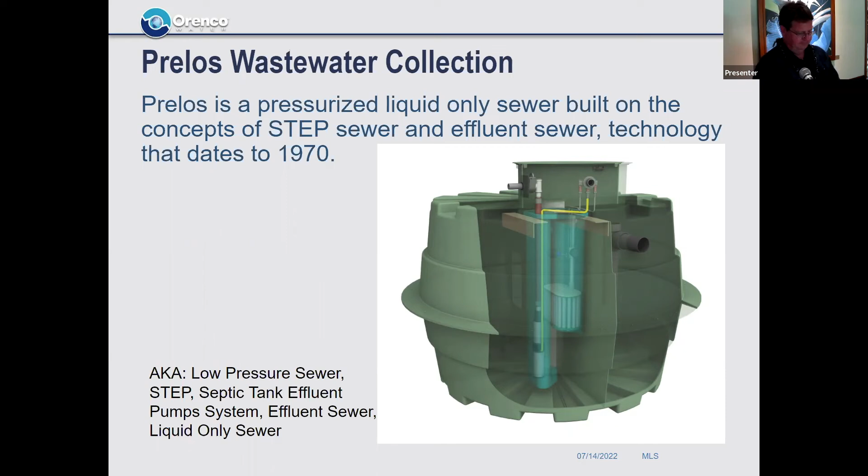So again, just not to get too technical here, this is what a Prelos processor looks like. Essentially there's one of these at each home or each building. They're sized, most of the systems we use will be sized to a 4-bedroom home or smaller. We have some larger systems for commercial and 5-bedroom and up.

And the concept's pretty simple. Unlike a septic tank, the wastewater flows down to the far side of the tank and then flows back to the pump vault. That pump vault is specifically designed just to pump from the clear zone in the tank. I'll show you a profile here in a second. But the reason it goes down and back is the longer we make that flow path, the more likely the solids are to settle, and obviously we want the solids to settle and any scum to float before it gets there.

The nice thing is that it's modular. You can see up on the top there that they come in, delivered to the site ready to drop in the ground. I'll show you how they're put together. But you can see down at the bottom, the main reason we do this is it provides primary treatment. So that treatment process that I showed you integrates with this. When you put them together, it's a very economic process.

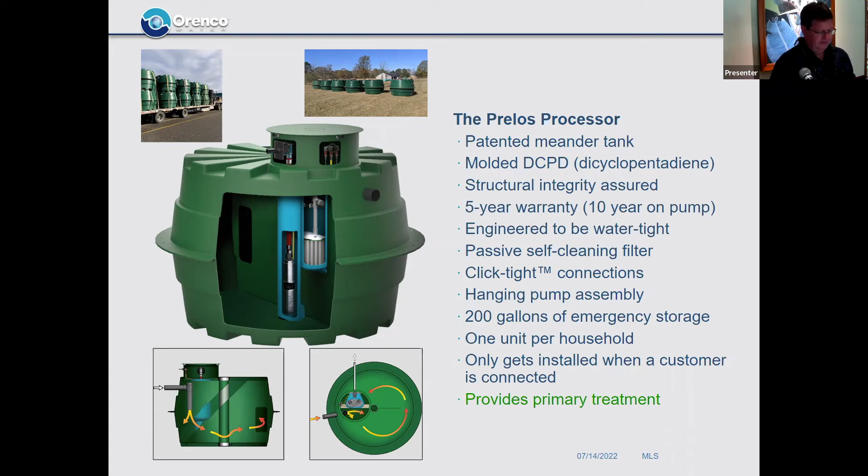So the basic concept again: the pipe from the left is coming from the source, typically a home, comes into this tank, and any time that you detain wastewater, it's going to stratify into 3 layers. The solids are going to go to the bottom, the scum's going to go to the top, and you're going to get that clear zone in the middle. It's a little hard to see at the bottom, but the wastewater strength is reduced significantly.

So for people to understand wastewater strength, we often measure it in BOD and TSS. The BOD coming out of these systems is about 140 milligrams per liter. Total suspended solids is about 30. Fats, oils, and greases are reduced. And again, it's all done passively and for free.

So this is a really critical element, because once we put it out in this collection system, it's going to behave very, very different. Just think about it in practical terms: it's going to be a lot easier to convey water than to convey solids. So here it is, the 3 layers and reduced wastewater strength.

So what does this now look like in a collection system? Again, you can see wastewater leaving the home, goes into that Prelos processor, and then discharges out to the collection lines. The main takeaway from these collection lines: right away you can notice they're small, they're shallow. Our typical collection main, especially in southern climates where you don't have to worry about freezing, is 2-inch diameter in most areas.

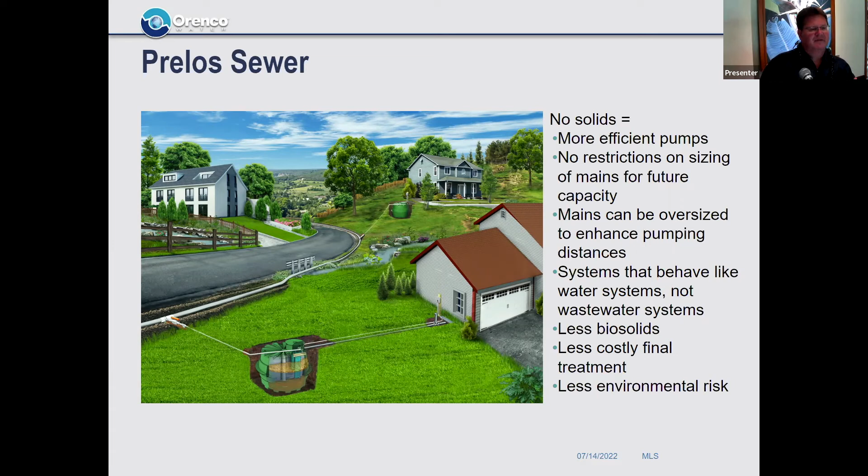So I can provide treatment right there, I can provide treatment 20 miles down the road, and I can design the system to get there without any intermediate pumps. So all these stations pump all the way to wherever you need to treat it. It can pump to multiple locations. So this is the theme: it's very, very flexible, very easy to use. And we can provide benefit not only in our treatment, but any other treatment process.

So here's just an example. Basically all we have to build to provide wastewater service is between the red lines — that's the 2-inch pipe. I call this the availability cost. So if you're going out to a community, you run these 2-inch lines, and you don't have to put in on-site units, you actually provide service. Think about this, if you're familiar with gravity sewer, where you're putting in a lift station, deep pipes, manholes, that's a lot of money. And certainly if you've seen the engineering reports for various areas in Hawaii, you can see that's been a lot of money. 2-inch pipes, very easy to put in and much lower cost. So this is a tool in the toolbox for how you can make sewer available and then incrementally connect people as you need to.

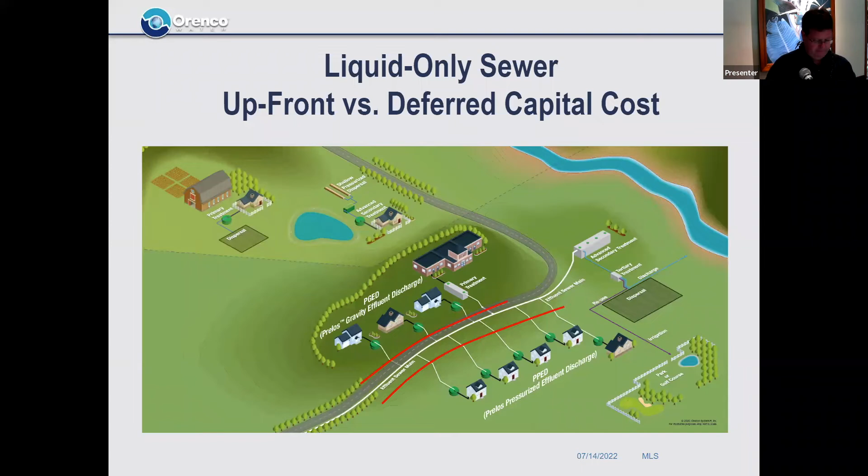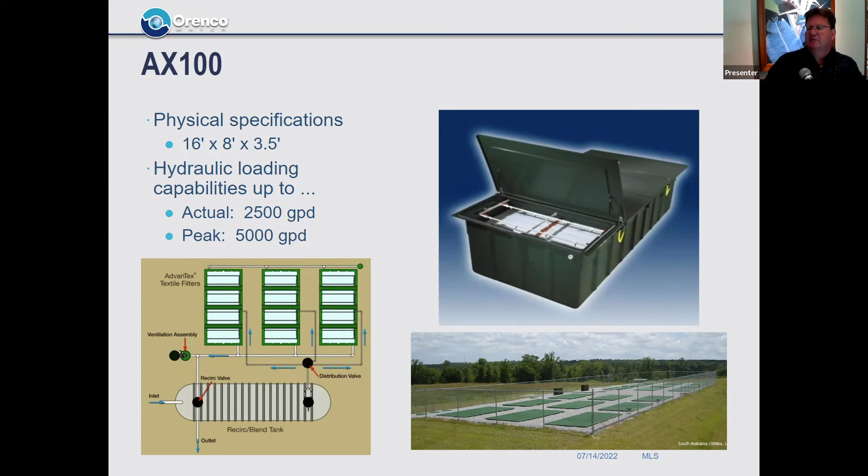Quickly just show you the scalability of some of these. So everything we do is modular. This is an AX100, and essentially we refer to these as pods. We can add pods to get to whatever capacity we need. In this case, each one of those pods is about 2,500 gallons a day. We just keep adding pods to get to whatever capacity we actually need.

This significantly — again, it's attached growth. There's no open tanks. It's modular, it's low energy, no corrodable parts, no headworks, no clarifiers, no aeration, no blowers, no odor. And just to show that, the picture on the right is in front of the tennis courts at a park. There aren't very many treatment processes that you can really do that with and people won't notice.

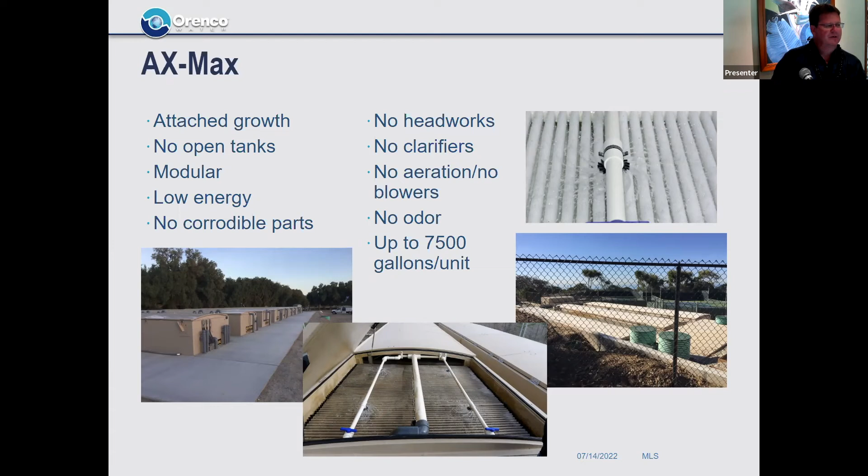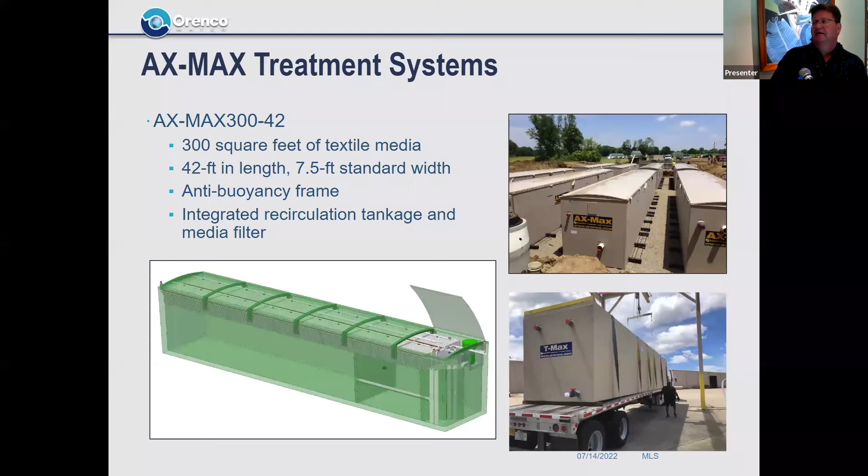So again, here's just really to emphasize how modular it is. There it is being loaded on a truck. Above, you can see a plant being built about 7.5 feet across. They can be buried, or they can be put above ground. Pretty cool stuff.

Again, just some more examples of what these things look like. I'd emphasize, we have a great website with a lot of information. I could probably sit here and talk for 8 hours very easily, and I'll spare you all. But if you're interested, just go there. There's loads of case studies on small communities, commercial properties that talk about how the collection system is being used. I'd encourage everybody to go visit our website, and if you've got hours of reading time, have at it. And with that, I'll be happy to answer any questions.

All right, who's got the questions to start us off with? We've got a couple of places, pilot projects that we're looking at in Hawaii. We're going to Black Point tomorrow. You can imagine how convenient this would be in a place like Black Point, where it's lava rock, and you have to bring in all the soil. Most of the lots don't have enough room for the septic, for the leach field. So we could hook up all these houses all at once and just take them right to the sewer line at Kahala Avenue. And there are lots of areas around Hawaii where we can do that. So it's super exciting. Any questions about this?

Thank you. Question from Travis on Zoom: what happens to the solids? Great question — it's always an interesting question. We get asked it all the time.

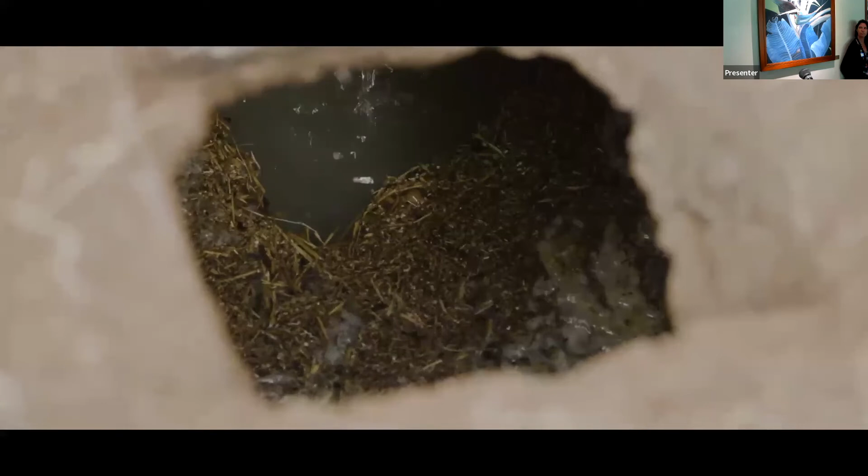So most of North Shore, the neighborhoods are right along the coast. Almost everyone is definitely on the cesspool, and it's really just a hole in the ground where all the wastewater from the household goes into a hole with an open bottom. So all the wastewater just percolates right into the ground, and all the waste that goes into the cesspool essentially leaches into the surrounding environment.

We need to protect, upgrade, and especially since you guys are close to the water, it would be great if we can get you into a system that has a nitrogen reducing capacity. With 88,000 cesspools across the state, discharging 53 million gallons a day of untreated sewage, that goes directly into our groundwater and can contaminate drinking water and then coastal ecosystems.

The native Hawaiians that were here, they knew that from ridge to reef everything is connected hydrologically. This is basic indigenous knowledge that the Hawaiians had that we're really just now starting to realize, and that this is not only a massive problem in Hawaii, but across the country.

Hawaii, Alaska, Alabama, Oklahoma, New York, and the Navajo Nation. There's this whole subsect of the country where 45% rely on what are called decentralized water solutions. These are remote communities where they don't have electricity, they don't have plumbing, where water comes out of the ground or out of a local watershed, and they go right back to where it came from.

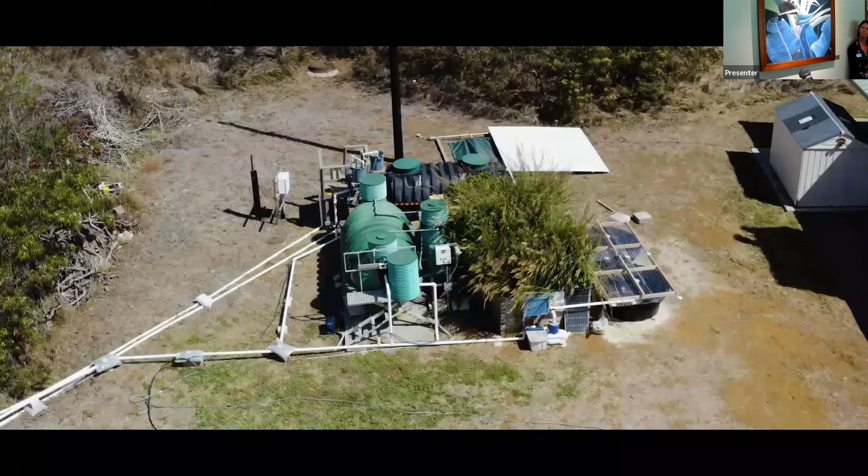It's not just the burden of the homeowner or the problem of the homeowner, because it can cost anywhere from 15 to 50,000 dollars in Hawaii to replace these systems, and homeowners just don't have that right now. The grass loves to uptake all that water, and therefore not only are we improving the quality, but also the quantity of the wastewater. We're able to achieve this for zero electricity in this nature-based system.

When you start to realize problems as big as climate change or wastewater pollution, there's only so much that one person, one group, one state can do.

Think about this as a ubiquitous problem, and wrap your head around why it's important to solve it. Around the country, there are similarities in terms of we desperately need funding. We need more federal oversight on these things. There's a need to educate policymakers and also just educate and open doors of creativity. So it's exciting to try to move past describing the problem and work towards having a solution.

I think ultimately the outcome that I'm looking for most is that communities and people will get safe access to services, closing this access gap that we have.